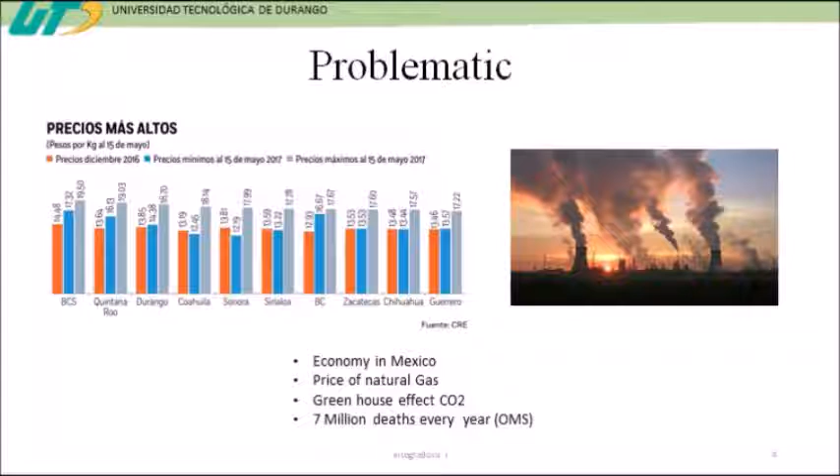The next graph shows the high price of LP gas in the current year in different states, showing that Durango has the third place in the high cost of gas. The general objective: with a vacuum tube solar heater, we recycle the fluorescent lamp to help reduce emissions from LP gas burning.

The specific objectives. The first is to conduct documentary research on solar heaters. Next, to design the solar boiler. Select recyclable and low cost materials. Build the solar boiler. Our problematic.

Mexico emits about 435 million tons of CO2 a year, of which 200 million are due to the burning of fossil fuels such as natural gas and gasoline. By implementing solar heaters throughout the country, the emission of 23.8 million tons of CO2 per year will be avoided.

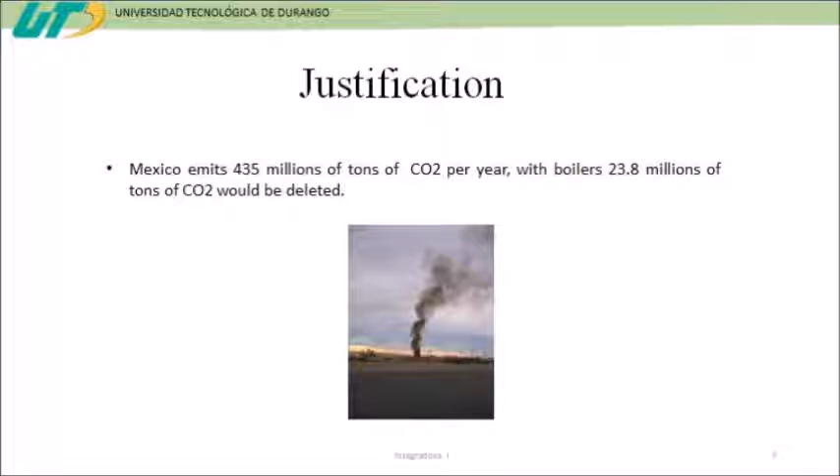Durango is one of the locations with the highest radiation in the world, with an average of 551 watts per meter squared, while the world average is 313 watts per meter squared, which makes it a state with great solar potential, which can be used to heat water in a clean and sustainable way without the need to burn any fuel.

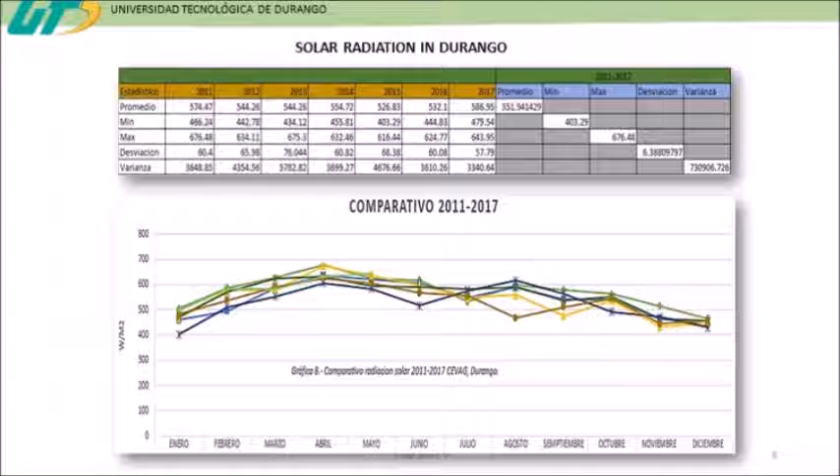In addition, there are still many fluorescent lamps in operation that will become waste in a short time, most of which will be dumped in a garbage dump without the proper care that should be taken, and contaminate. Recycling the tube is a good option to avoid this.

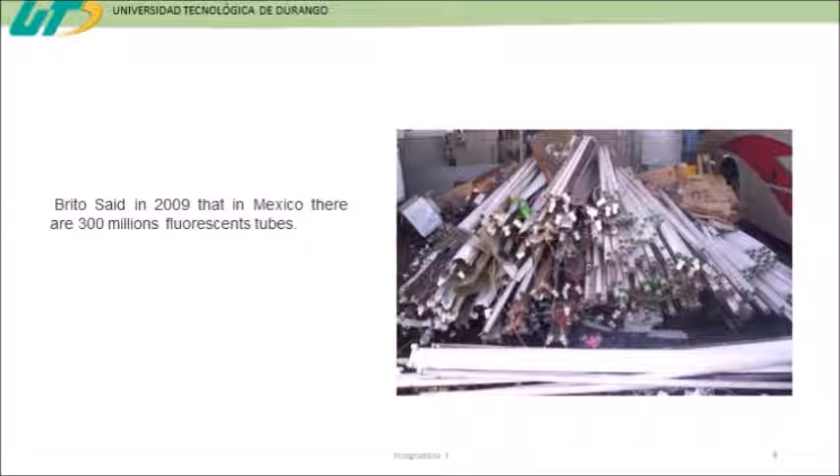Conventional solar heaters use vacuum glass tubes to heat water, as glass is a great thermal conductor and is excellent for this task. Reusing fluorescent tubes to perform the same function is a feasible option to prevent them from ending up in a garbage dump, causing even health and pollution problems.

So, well, we're gonna see the theoretical framework of this project, which is the things you should know before you see the prototype. First of all, you need to know all the kinds of solar boilers there are in the market, which are the flat one, with a flat surface and the tank, and then the most common ones, the heat pipe ones, which consist of tubes with vacuum to make this process of heating water.

And then the third one is the concentration system, which is mostly used in industrial processes because it reaches higher temperatures, up to 120 degrees Celsius. So this is mostly used in industrial processes.

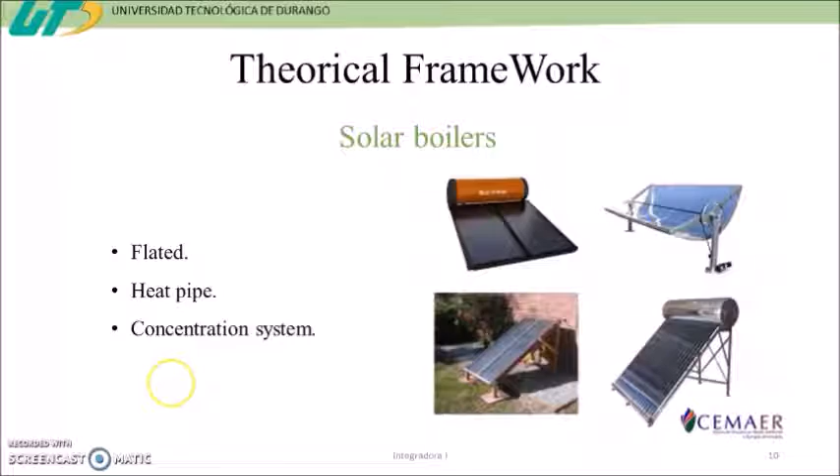The next topic we're gonna see is heat transfer. As you know, there are three ways of transferring heat: radiation that comes from the sun, conduction that happens in solids, and convection that is made with a fluid like air. It needs a medium for transferring, like the air. The hot air changes its density and goes up, and the cold air goes down. So those are the three methods of heat transfer.

I'm gonna explain the operational work of the heat pipes, which are gonna be used in our prototype. The operational work is basically this one. The sun gives us radiation which comes into the tube, which has vacuum right here, no air in the tube. So the radiation comes directly to a copper tube, which gets the heat, and right here there's water.

So as this is hot, the water gets warmer and gets hot, and by density changes, the hot water goes up, and the cold water stays right here. So this is the simple explanation of how it works. The cold water goes down, and then when the cold water is heated, it goes up by density changes.

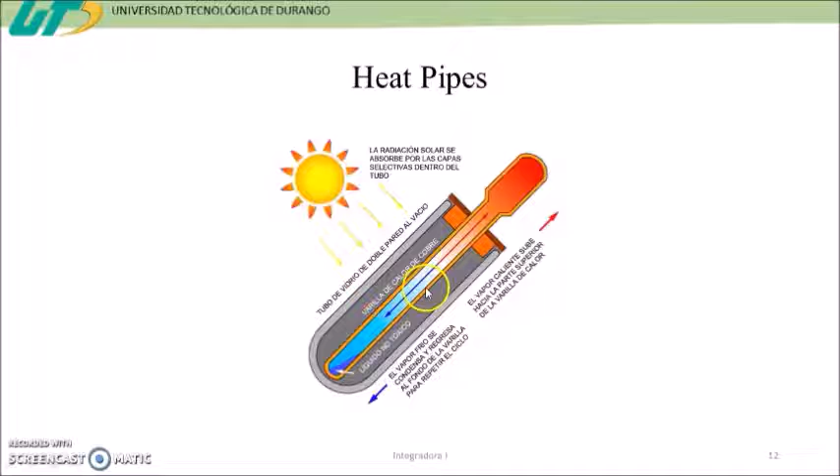The design is really important in this thermal machine because it's gonna give you the hot water when there's no sun. So this is the design made in SketchUp of the exterior tank, because there are two tanks involved in a solar boiler.

This is the behavior with insulation. With polyurethane as insulator, with 5 centimeters of polyurethane as a layer, and with 10 centimeters of polyurethane as a layer, it can save the heat until 18,000 seconds, so around 5 hours of saving the heat. So it's important to be sealed with this insulator, because it's gonna save the hot water that is in the tank.

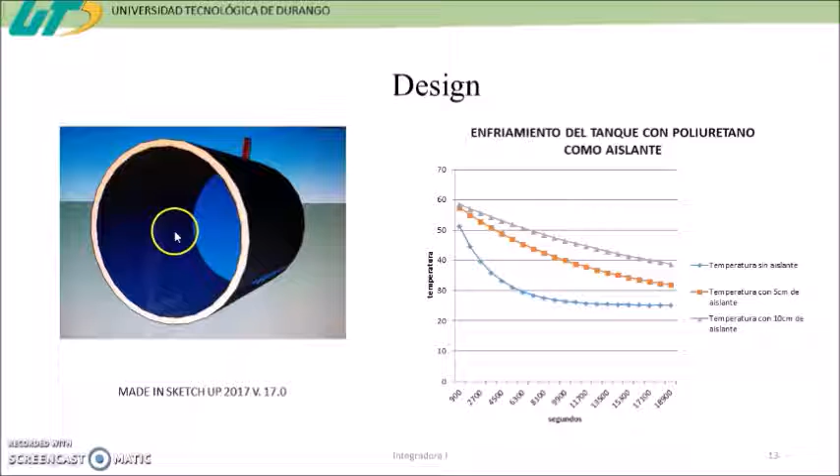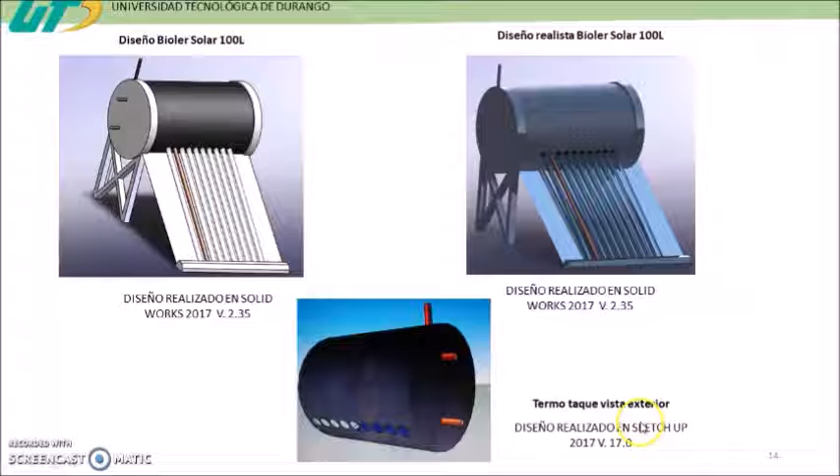This is the design of the full prototype, which consists of the external tank, and right here in the inside of this tank there's the polyurethane, and then the inside tank, which is holding the water, and then the tubes right here with the copper tubes, and then the lamp tubes over here. This is the realistic design of it. And this is the exterior thermal tank, drawn in SketchUp. These were made on SolidWorks.

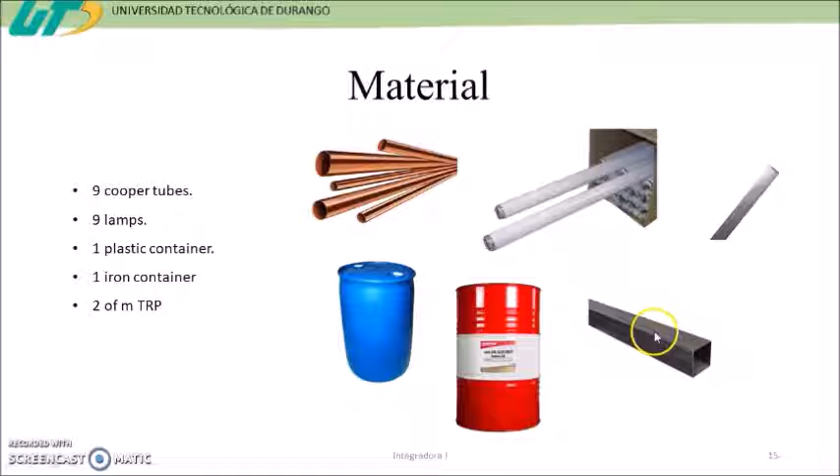The material for making this prototype was 9 copper tubes with a diameter of 1/2 inch, 9 fluorescent lamps for making the greenhouse effect and getting the copper tubes hotter, then the plastic container, which is going to contain the water, the iron container, which is going to contain the plastic container, and 2 meters of PTR, which is a profile made of iron, to make the general structure of the prototype.

The methodology, the process of making it was not easy, but it is possible to make it. First, we add the polyurethane to the exterior of the plastic tank, and then we put it inside of the iron tank to make the holes where the tubes are gonna fit into the tank. And then the structure was made with the profile.

Next, one of the most important parts was sealing the tubes, making these containers and sealing them to get them hotter. So we sealed with high temperature glue to not have problems with filtrations of water inside of it. And after this, we put the tubes inside the tank, and we gave it the shape it has. And after that, you should add more polyurethane and seal it to not have any filtration of water. So it has to be sealed perfectly.

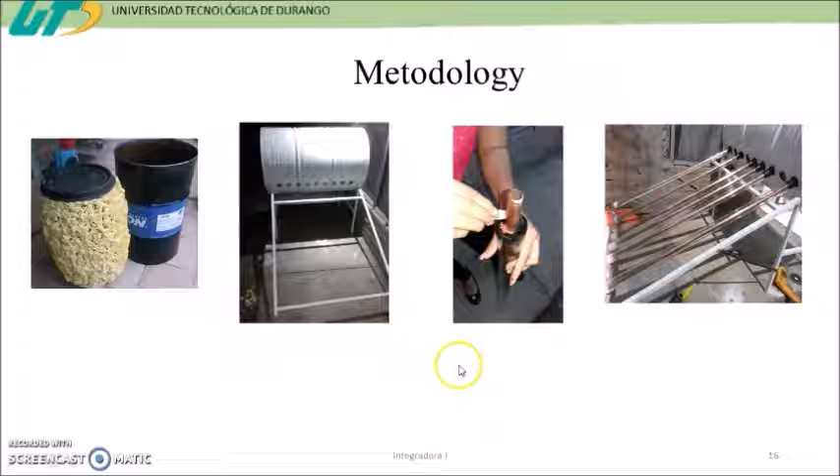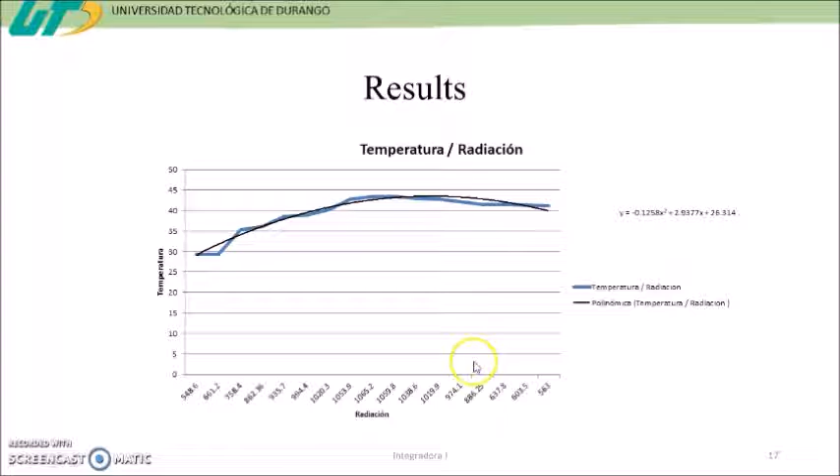Well, we took measurements for one day from 10 a.m. to 6 p.m. every half an hour. We took temperature and radiation, and it gave us this lovely graphic, which gave us the highest point. The highest temperature reached was 43.5 at a radiation of 1059.8 watts per square meter. This is okay for the purposes that we needed, that is taking a shower. So yes, we think it's a nice temperature.

The conclusions. I can conclude that the boiler is efficient because it has 39% efficiency, which is not too good, but it's okay for the purpose. The solar boiler reaches 43.5 Celsius degrees, which is okay because the recommended temperature for taking a shower for adults is between 30 and 40 Celsius degrees, so it's okay.

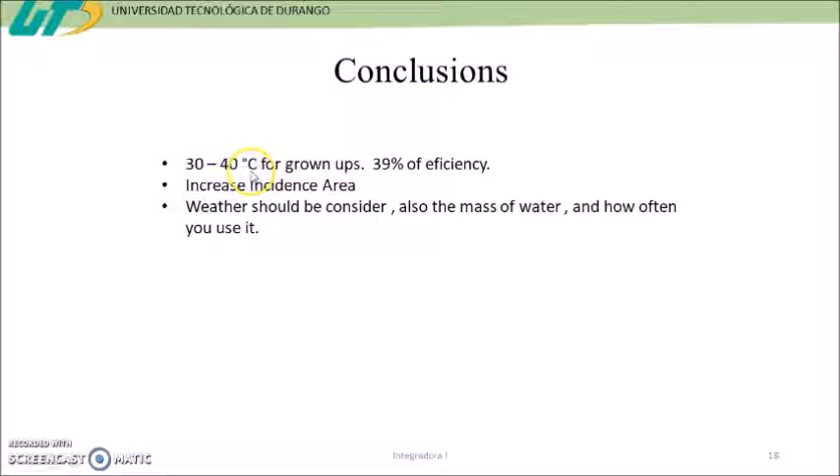Also, if you want more temperature, the modification that we could make is increasing the incidence area of the solar boiler, which is the copper tubes. We should use ones with more diameter to increase the insolation and accelerate the process of heating water. So if you change to 1 inch, you can reach temperatures of 50 or 60 Celsius degrees.

And finally, we should be careful with the weather, because as you know, this only works with the sun, and if you don't have it, you should have a really nice thermal tank to keep all this hot water. And we also have to be careful with the mass of water, because if it's too much water, it's going to take longer to heat it to the temperature wanted.

And how often do you use it? You have to take care of that, because when you take out the hot water, the cold water is getting in, so the temperature is getting low. So we have to take care of these points.